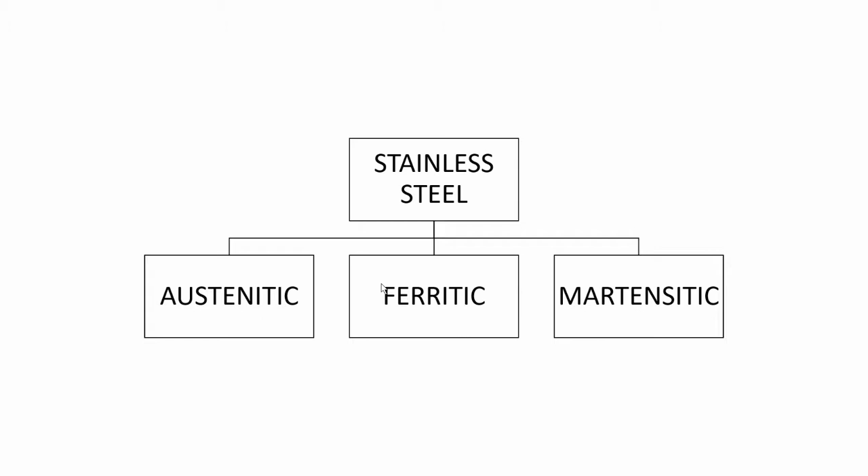So what are the different types? There are basically three types: austenitic, ferritic, and martensitic stainless steel. These names are given based on their microstructure. First of all, let us see austenitic stainless steel. They possess an austenitic structure at room temperature, as the name suggests.

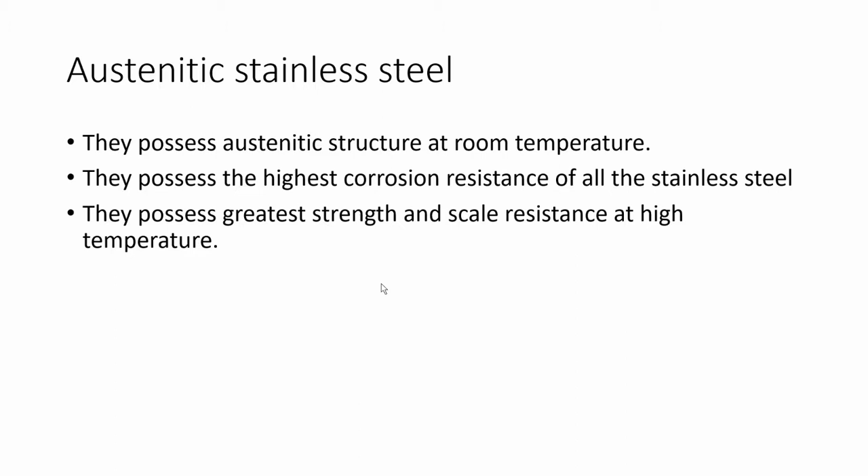They offer the highest corrosion resistance among all the stainless steels, among all three. And they have good strength and scale resistance, that means corrosion resistance at high temperature as well. If you heat this type of steel, they do not lose their ability, they retain their strength and scale resistance. They retain their ductility at lower temperatures also.

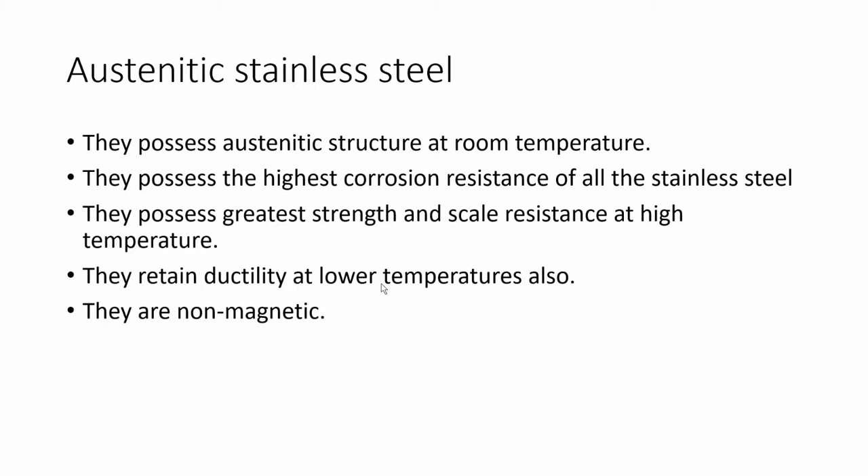Generally, the material tendency is that if you cool it down into the cryogenic temperature range, it becomes a brittle material. But austenitic stainless steel retains its ductility. And the most important point is that they are non-magnetic. This point you have to remember.

It is used in the aircraft industry, food processing, household items like the utensils we are using, milk tanks, and many other applications. I have not written any specific application here.

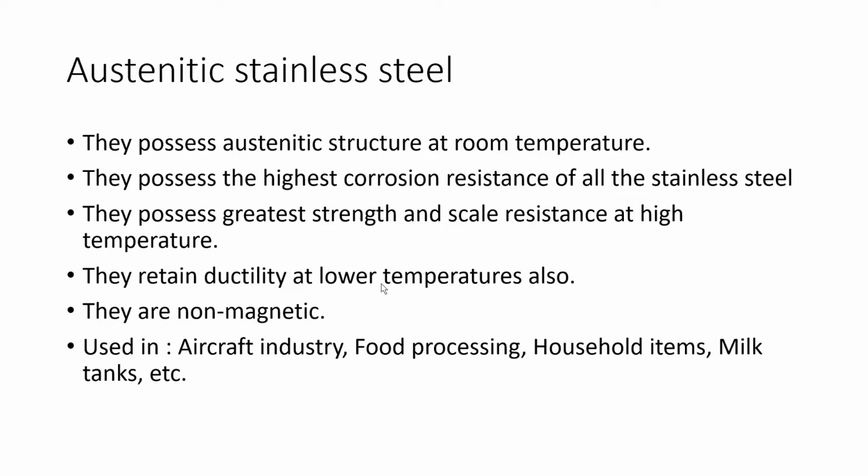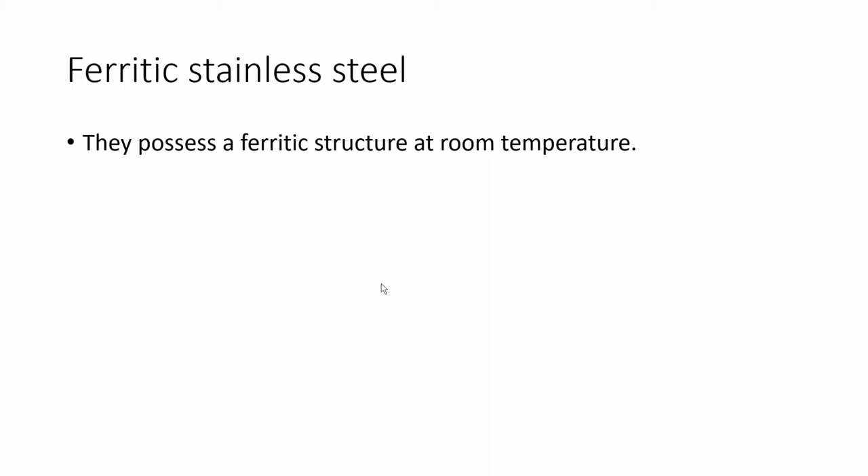Next is ferritic stainless steel. They have a ferrite microstructure at room temperature. And they have a low carbon to chromium ratio; carbon by weight, the carbon to chromium ratio is very low in this type of steel. This steel cannot be hardened by heat treatment.

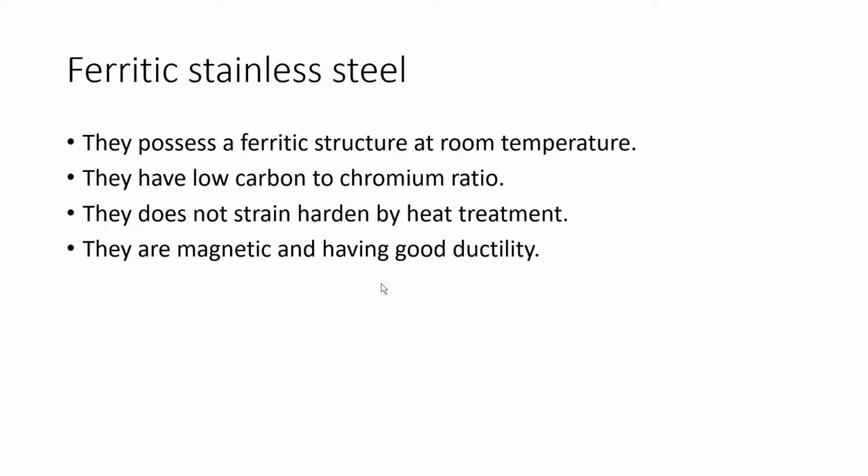They are magnetic, and they also possess good ductility. They are magnetic because they consist of ferrite structure. It is used in lining for the petroleum industry; that particular thing is called a liner, and it is made of ferritic stainless steel.

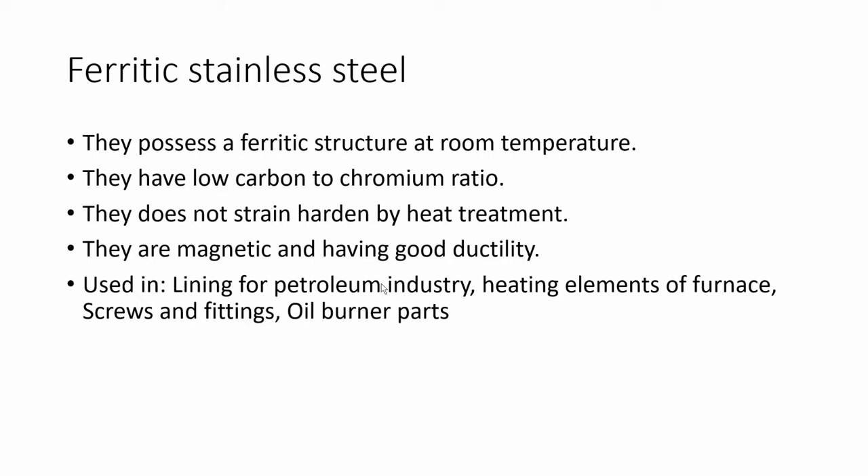Heating elements of furnaces, and screws and fittings: if you visit any hardware shop and ask for SS screws, he will give you ferritic stainless steel screws. And oil burner parts; it is an old application, but we have to remember it.

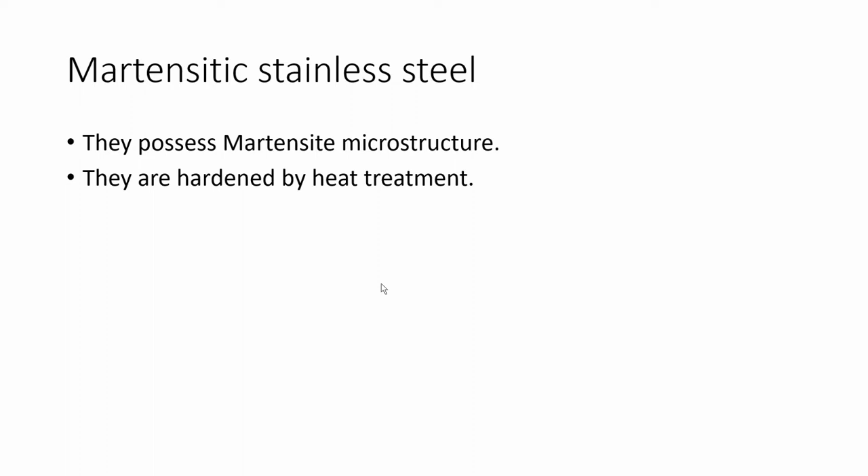Next is martensitic stainless steel. They possess a martensite microstructure; they are quenched, and they are hardened by heat treatment, as I already told you. They are magnetic in nature and possess the best thermal conductivity among all the stainless steels. So the thermal conductivity is highest for martensitic stainless steel.

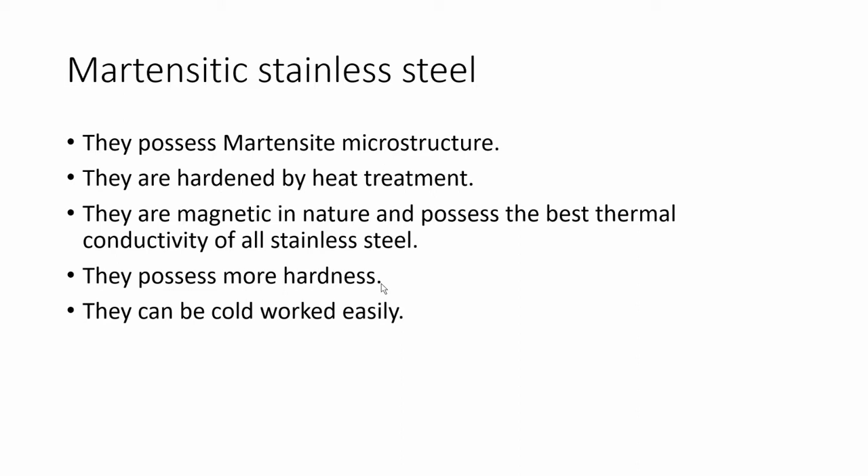And they possess more hardness, obviously, because of the martensitic structure; they are very hard and brittle. And they can be cold worked easily. If you make some cold worked part from stainless steel, then you have to use martensitic stainless steel.

It is used in pump and valve parts, turbine buckets, rules and tapes, the kind of rules used for measurement which we call invar. In invar some stainless steel is always present, and this kind of martensitic structure is used. And surgical instruments like needles, trays and scissors are all made from martensitic stainless steel. So these are its applications.